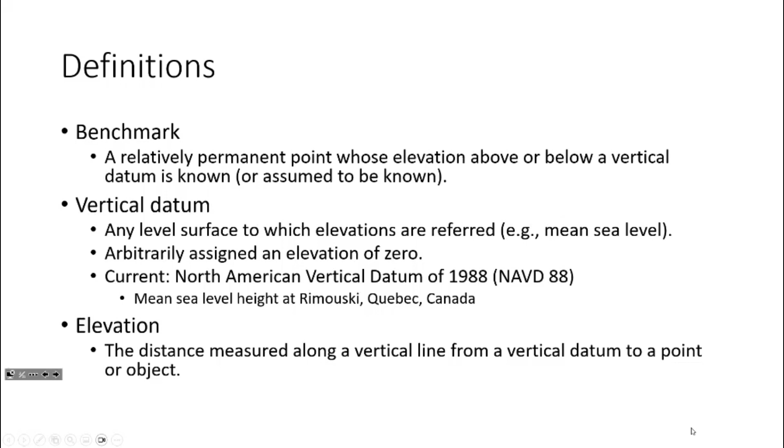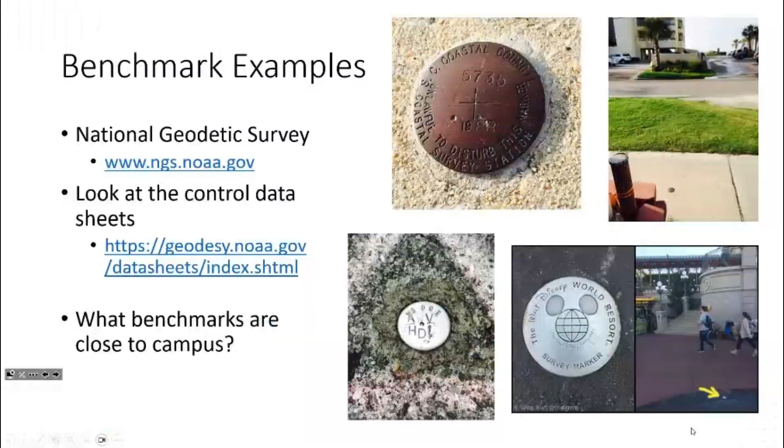You can look up benchmarks pretty easily. I have this website right here, and you can look up the control data sheets. I've got a couple of slides to show you what this looks like. I went to this site and put in Huntington, West Virginia, and you can see all of the benchmarks located. This is pretty much near Marshall's campus.

Different benchmarks are going to be set for different data. Some of them are only going to contain vertical control. Some are going to contain X, Y, and Z. Some might be for GPS and what have you. So let me show you one. If we look right here, this is the Huntington area, and I'm going to show you what one of these data sheets looks like for the benchmark right here. This is the one at Riverfront Park.

When you pull the data sheet, it sort of looks like this computer readout, but there's a couple of lines that are really key. For example, here we have NAD 83, this shows the datum 38, 25, 25.62 north, 82, 26, 34.74 west. What do you think this first row is? It's coordinates, specifically latitude and longitude. So this is the latitude and longitude of this monument, and then NAVD 88, the height in meters and in feet.

We can assume that point has an elevation of 547.76 feet. Some of the data sheets actually contain photographs. This one did as well, and I put those photographs here so you can see where the benchmark is. This is the flood wall at Riverfront Park, and they have the benchmark inset into the wall, so you can go there and see the point in question. Some of them have photographs, some don't, but they're all going to contain lat long and elevation. Does that make sense?

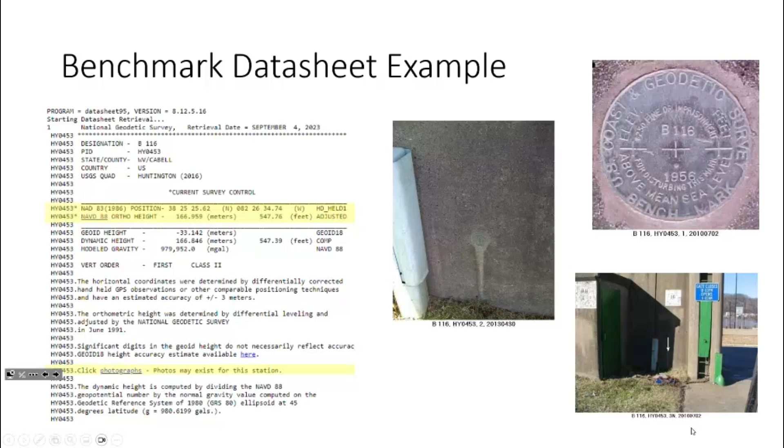The idea is that if you're performing a survey, you can tie into that, reference off of that, and begin your work. I just want to make sure everybody's clear on what a benchmark is. We are going to use a benchmark today. I have a point here in front of Morrow Library. We're going to use that as our reference to determine the unknown elevation of a given point. The lab this week is going to be determining the elevation of the bench on the memorial fountain. That's what we're going to be doing today.

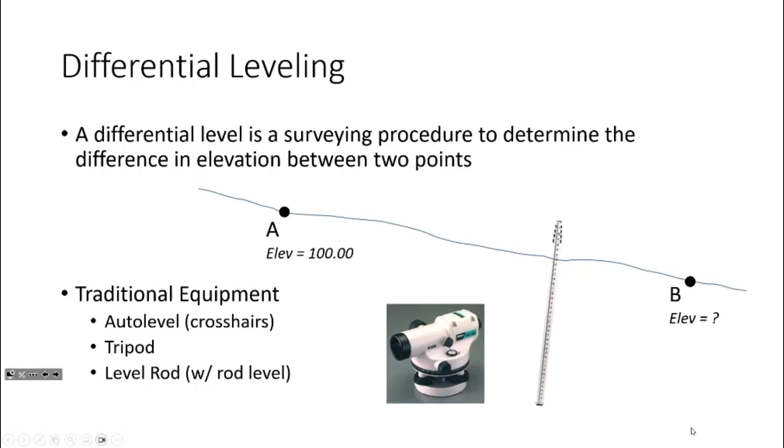Okay, so let's talk about differential leveling. A differential level is a surveying procedure where we take the elevation of a known point and use that as reference to determine the elevation of an unknown point. In order to perform a differential level, you don't need a total station. All you need is an auto level, a tripod, and the level rod with the rod level with it. So the amount of equipment we're going to need today is far less than we needed in our previous lab.

So I've got benchmark A, and let's assume for our discussion purposes that the elevation of benchmark A is known. I'm just going to make up a number, let's say it's 345.60 feet. And let's say the goal of the survey is to determine the elevation of station C, what have you.

Normally what you would try and do is perform as few measurements as possible and measure as directly as possible. But let's say there's a big building in the middle of the way and you can't shoot that. So instead what you have to do is go around, and you're going to see that very viscerally today because that's what we're going to be doing in lab.

We're going to be surveying from the front field of Morrow Library all the way to the memorial fountain. There's going to be stuff in the way, so you'll have to figure that out. So what we'll do is perform a series of intermediate setups. Maybe we'll start off by setting up the instrument right here. So we'll set up our level right here, get it set up and whatnot.

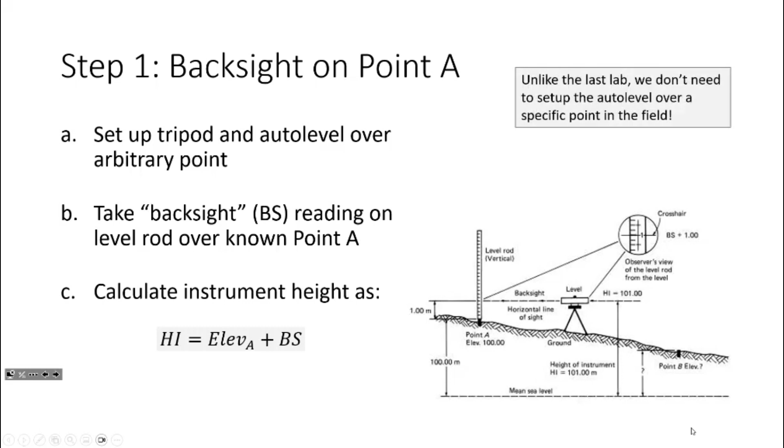So what we'll do is read the rod, and we call that a foresight. So we run the foresight. Now let's say we do this foresight reading, and let's say it's, I don't know, 6.75 feet. What does that tell me? Well, from the first measurement I took the elevation of the benchmark, added the backsight, and that told me the height of the instrument. I can take the height of the instrument, subtract the foresight, and that tells me the elevation of this turning point. Does that make sense?

And so the way a differential level works is like this: you're going to take a backsight, then turn and take a foresight. Then once you've taken the foresight, you take the instrument, move it somewhere, let's say right here, and then take a backsight on the turning point, go back up to the next station, take a foresight - it's sort of this leveling loop. So you start: instrument here, backsight, foresight, instrument here, backsight, foresight, instrument here - you have this chain link that you keep going.

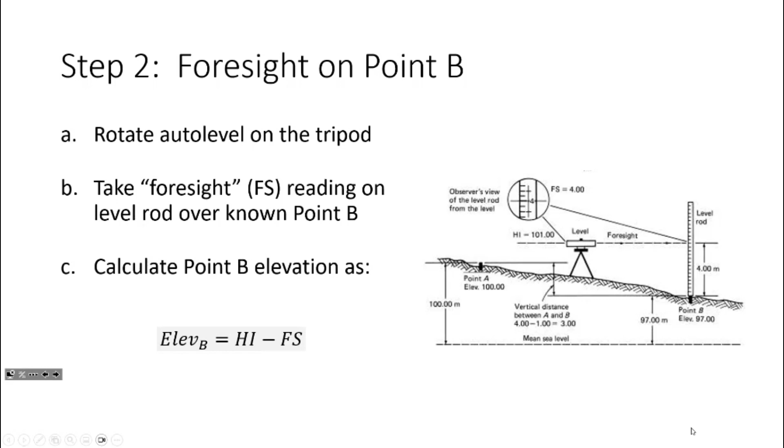Until you get to a point where you have a setup right here, you have your backsight and then your foresight, and you end up back where you started. Does that make sense? So that's kind of the idea of a differential leveling loop, okay? Now, a couple things about differential leveling loops - first off, unlike the last lab, this is going to be kind of weird, but it doesn't really matter where you set up the instrument.

What matters is that the instrument is level, that it's free from obstructions so you can actually see your backsight and foresight, and that your distance between those two points are relatively equal. So we don't need the plumb bob to get the instrument over a specific point. What matters more is that your benchmarks and your turning points are well established.

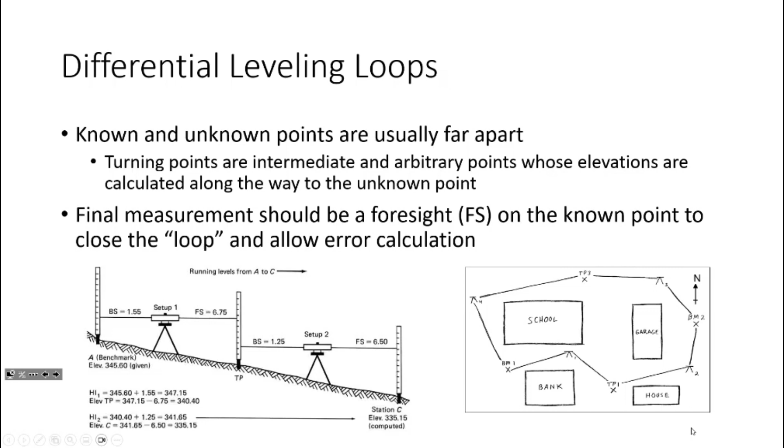Again, like I said, the idea is that you're going to perform this in a loop. Setup, backsight, foresight, setup, backsight, foresight, setup, backsight, foresight. So you have this sort of loop setup. Everybody with me on the idea so far?

Okay, now before we get into the calculations, I want to make sure that we're clear on how the notes are set up, because the notes might be set up in a little bit of an odd fashion the first time that you see it. So I want to make sure that's very clear.

So what should happen first off, your very first row? So what I've got here is my table, and don't worry, your lab handout will have the guide on how to draw your table, but I want to go through this with everybody. Your very first row will be the benchmark that you're using. That's the starting point, the known piece of elevation.

So we're going to start out with our benchmark here, and we know the elevation is 345.60 feet. I'll just leave the feet off because everything's going to be in feet. With me so far? Now, if you recall, the very first thing that we did is we did a backsight

onto point A, we set up our instrument and we did a backsight on point A. So we did backsight, then foresight, backsight, then foresight. So we backsighted this point, the number I used was 1.55 feet. But then the next thing I did is I did a foresight. I didn't do a foresight on this point, I did a foresight on turning point 1. So my foresight doesn't go here, it goes down here. So my foresight of 6.75 goes here.

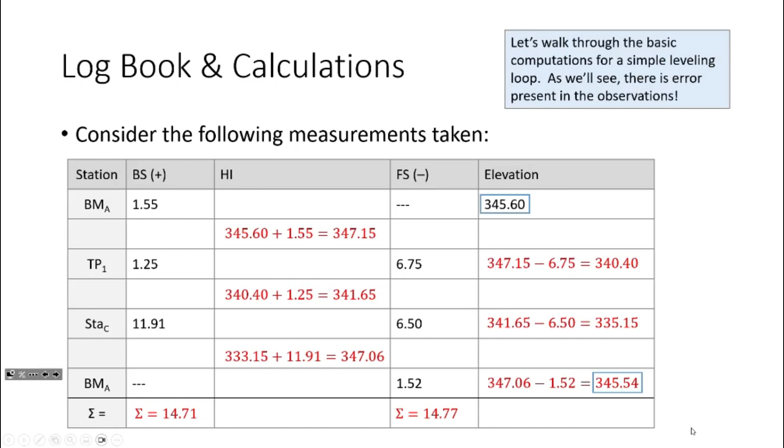0.06. That process is what's called a page check, and it's something that I want everybody to do in lab today, to make sure that when you're performing your calculations, the difference between these two matches the difference between these two. Does that make sense?

Okay, alright. So here's the procedure, right? You locate a point of known elevation, which I'm going to give you. You set up your tripod and your auto level between that and a turning point. Backsight the known elevation, foresight the turning point.

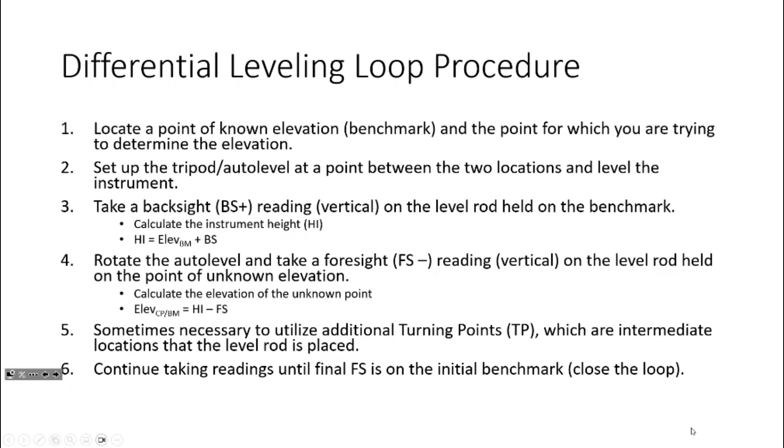Then the rod person stays here. You move the instrument and you keep repeating the process until you get back to the initial benchmark, closing the loop. Does that process make sense?

Okay, now what we were talking about, what you identified is what's called a page check. So the error of closure, and I will probably call that closure or misclosure, it all means the same thing.

The closure can be calculated two different ways. You can take the sum of the backsights minus the sum of the foresights and get negative 0.06, or you can take the final elevation minus the initial elevation and get negative 0.06, okay? If you do that calculation both ways, you should get the same answer.

That's what's called a page check, and I want you to do that today just to make sure that you don't have any math errors when you set everything up, okay? Everybody with me so far? Okay, any questions on the idea?

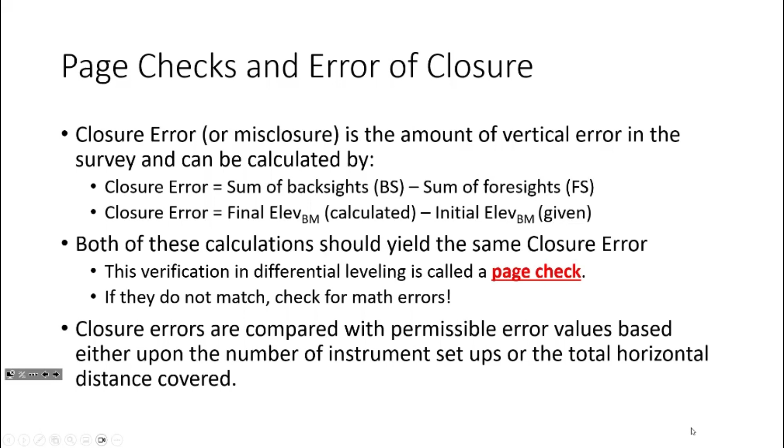Okay, alright. Now, with differential level surveys, with vertical elevation measurements, we have different orders and classes of the survey, okay? We classify a survey based on essentially two quantities: how much misclosure we have and the distance traveled. Now, for this lab today, we're not going to measure the distance traveled.

The reason why is because there are two ways of determining this adjusted elevation. One is using an equal adjustment, one is using a weighted adjustment. The equal adjustment is easier and doesn't require distances. And I want you to get used to doing a differential level, so I'm going to try and make it as easy as possible during the first lab.

But you do need that distance in order to compute the closure, the classification, or the precision of the survey. And don't worry, we'll get to that in lab here in a bit. Okay, now, in order to compute the allowable closure error, we use the following expression.

So we take the closure and compare that to the square root of the distance traveled and this constant, according to this table here. In order to have, let's say, a first order class 2 survey, your M value needs to be 4 or smaller. The big item to keep in mind is that this is in metric, so you've got to do some unit conversions.

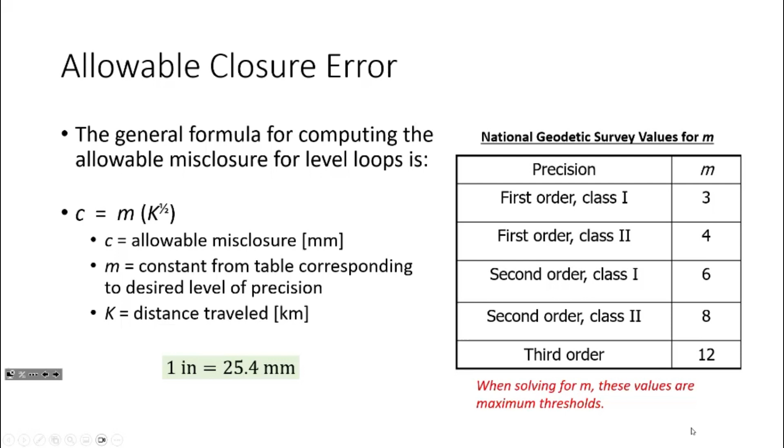All right, let me show you how this works. Let's do a couple of these quick error examples. This isn't incredibly difficult. I think you'll see how it works. I just want to make sure we're all comfortable with this part.

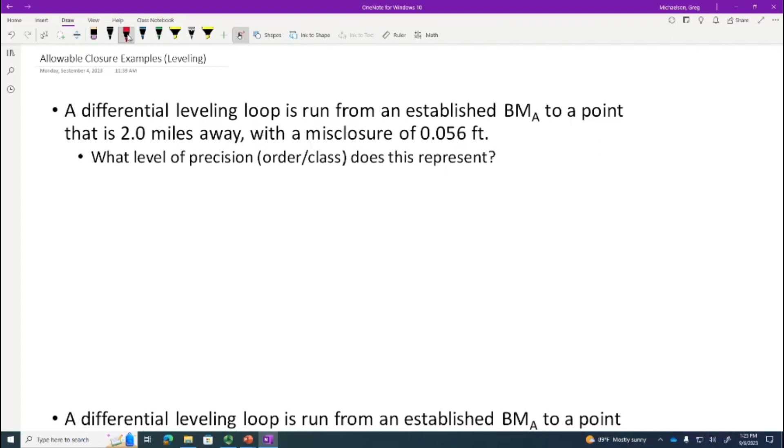Let's start with the first one, which is more in line with what you'd need to do in the real world. Let's say you've run a differential leveling loop from an established benchmark that's 2 miles away. Now the misclosure is 0.056 feet, so let's consider that C is the closure error, which is 0.056 feet.

Now the distance traveled - let's pay attention. If a differential leveling loop is run from this benchmark to a point that's 2 miles away, what's the total distance traveled? Keep in mind, it's a loop. 4 miles, right? We're going 2 miles there and 2 miles back. So we'll assume the distance traveled is 4 miles, because it's there and back.

Now we've got to convert this to metric. For the C quantity, we'll say C is 0.056 feet, and we'll use: there's 12 inches in 1 foot, and 25.4 millimeters in 1 inch.

Anybody got an answer for me on this one? Because everybody brought their Casio FX115 ES Plus or similar scientific calculator to class, right? Of course. That should just roll off the tongue. I mean, come on, what are we talking about here? Everybody brought their calculator to class, right? I'm waking everybody up. We're going to be outside here in a little bit. At least some of you are.

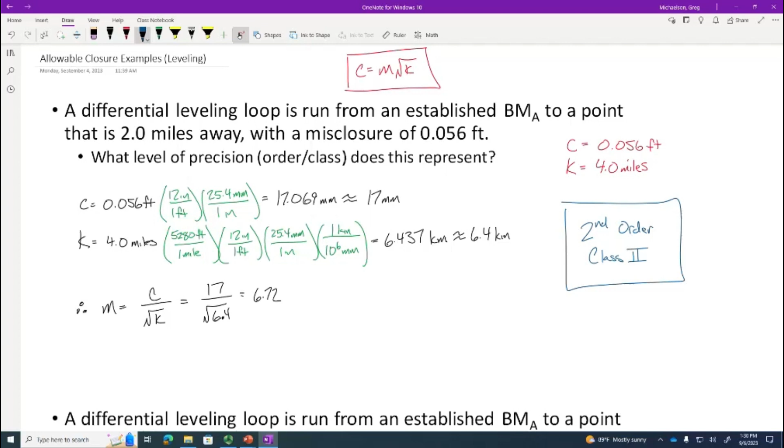So this one's a little backwards. We've got a differential leveling loop that we're running from an established point to a point that's 3.5 miles away. So my loop in this case is 7 miles. And then we'll do the same thing.

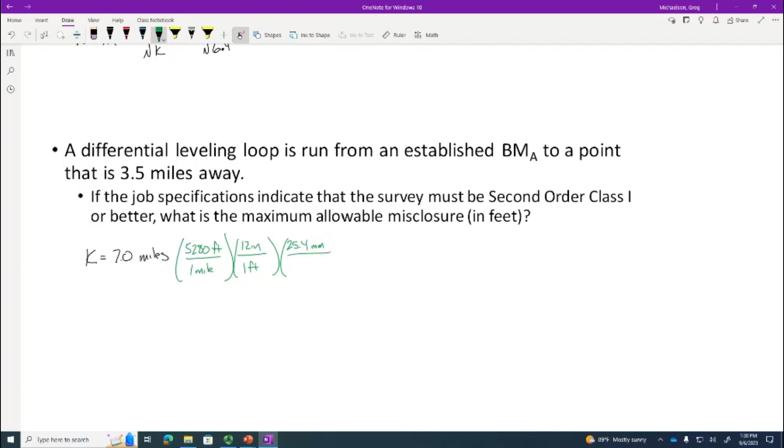And then this is 10 to the 6 millimeters, 1 kilometer. I'm getting 11 something. Anybody else getting that? 11.265. That right? So to 2 significant digits.

So 11 kilometers. This one's asking something a little different. Let's say this is before the job is conducted, and the specifications indicate it's got to be a second order class 1. So second order class 1 is asking what's the allowable misclosure. If we go to our specifications, we find that for second order class 1, we need an M value of 6. So an M value of 6 means that our misclosure is going to be computed as M times the square root of K.

So 6 times the square root of 11. And what is 6 times the square root of 11? It comes out to about 19.8997, something like that. Keep in mind that's in millimeters. So we'll call that, I don't know, 20 millimeters.

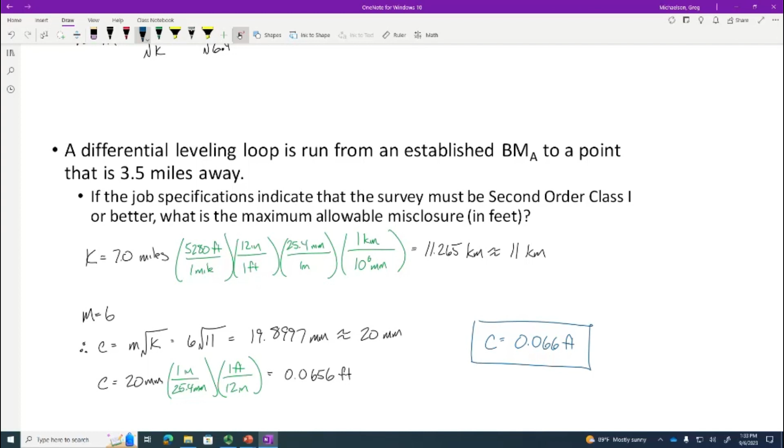Does that make sense? Everybody okay with that? I didn't think these calculations would be terribly difficult. I want to make sure that we're comfortable with the adjustment part, and that's what I want to spend the rest of the lecture discussing, these adjustment mechanisms. But so far so good?

So what we're going to do is we've got to fix this problem. We've got to adjust our elevations such that we close our loop. And there are 2 means of doing that: one is an equal distribution of error, and the other is a weighted distribution of error. We'll talk about weighted distributions on Monday.

Okay, so let's go back to our loop. This is the same loop I have here on the board. And the page check, as I mentioned, so we have our closure, which is the sum of the backsights minus the sum of the foresights. We got negative 0.06. And then we can also check that with the final elevation minus the initial elevation.

That's what we're going to try and adjust. So sometimes students get a little concerned about the signs. With both methods, let's just keep this simple. See how this elevation is lower than this one? So what that means is that all of these intermediate elevations need to be raised a little bit such that this gets to 345.6, because this is our known elevation. This value down here needs to be 345.6.

So what we're going to be doing is raising these elevations a little bit. Now, how much error do we have? We have negative 0.06, right? That's our error. Now, how many instrument setups did we have on this level? 3. So an equal distribution of error would mean we have this error across 3 setups, so we need to do an adjustment of positive 0.02 for every setup. That's an equal adjustment of error. Okay, so that's what an equal distribution means.

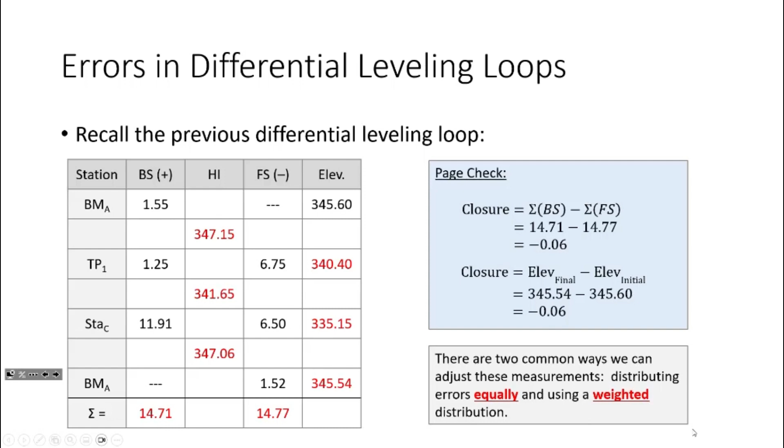I've got some formulas here, but I really think that once you see the pattern, you'll go, oh, okay, the pattern's usually a little easier to follow than the formula. The idea is that we compute an adjustment, which is the misclosure divided by the number of setups. Now I've got a negative in here because I've got to flip the sign. My error is negative 0.06, so my adjustment needs to be positive to bring everything up. So what I will do is I will recompute these elevations.

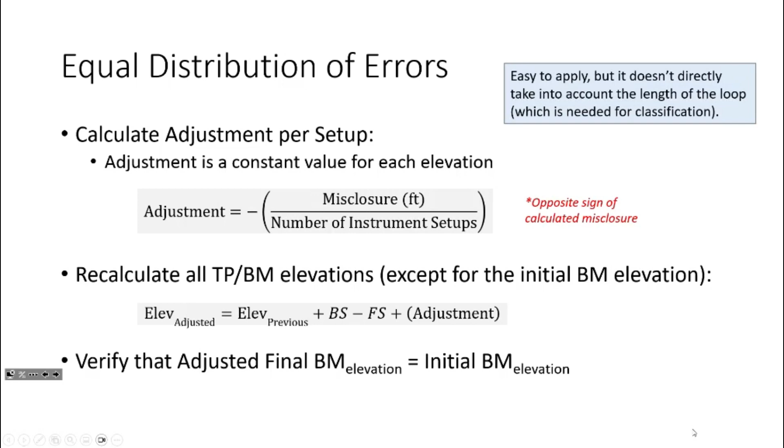And I'll recompute these elevations by adding this adjustment, okay? So let me show you how this works. Here's this table on the screen, I've got it here on the board. Let me grab these markers and let's walk through it.

So I'm starting out, my adjusted elevation needs to be 345.60, because I know that's not going to change. That's my benchmark, that's my known elevation. So how do I compute this elevation right here? How do I do it? Well, I start off with

345.6. What am I going to do? I'm going to add my Backsight, which was 1.55, and subtract my Foresight, which is 6.75. And that's how I got this number.

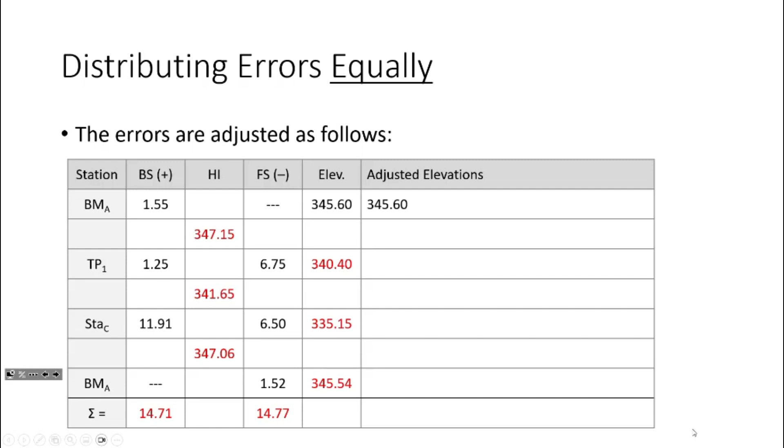But now what I've got to do is add my adjustment. So instead of 340.40, I'm going to get 340.42. Does that make sense? So that's what I'm going to do right here. That's how I get this first one, this value right here.

So how do I compute this one? Well, what I do is I take my adjusted elevation, add the Backsight, subtract the Foresight, and then add another adjustment. So I don't use this number, I use my new one. Take my new elevation, add the Backsight, subtract the Foresight, add the adjustment, and what do I get? I get 335.19.

With me so far? So again, I'm basically doing these adjustments all over again. I'm doing these elevation calculations, but I'm referencing this new column. So what do I do down here?

Take my new elevation, 335.19, add my Backsight, subtract my Foresight, and then add my new adjustment. Somebody calculate that out, tell me what you get. My new elevation, add the Backsight, subtract the Foresight, add my adjustment. What do I get?

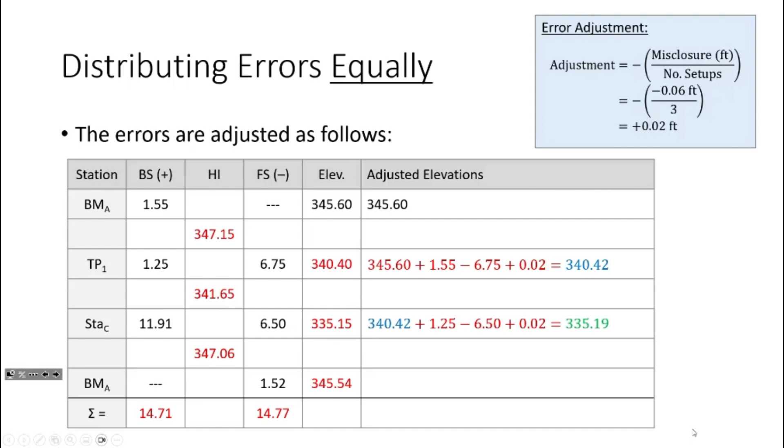345.6. Exactly where I started. Does that make sense? What do you think? Is that complicated? That's basically what we're doing. And to make sure we're all comfortable with this, I've got an example we're going to do here in a second. We're going to do one more, fully, start to finish, together.

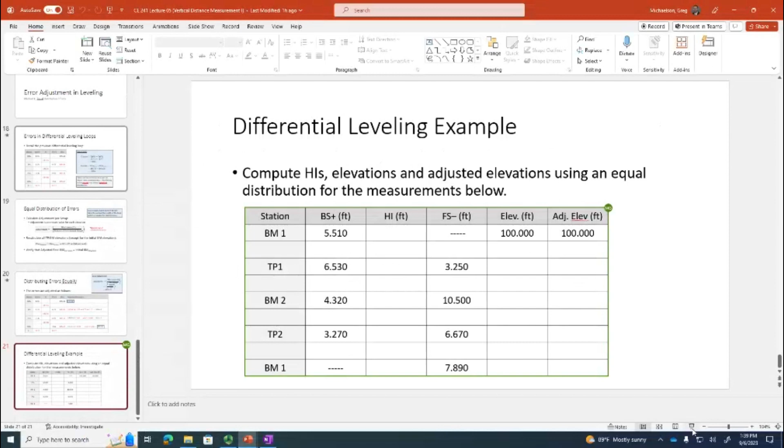All right, I'm going to make this table a little bigger to make sure we're all comfortable with this. So what we're going to do is we've got a leveling loop with a table set up for it, and we're going to perform all of our calculations necessary for heights of instruments, elevations, adjusted elevations. We're going to do this start to finish. Let's see how we're doing.

So we started out with a benchmark of 100 feet. We took a Backsight of 5.51. So what can I do with that? Elevation, Backsight, what can I measure now? I have to look at your elevation, and where does the height of instrument go?

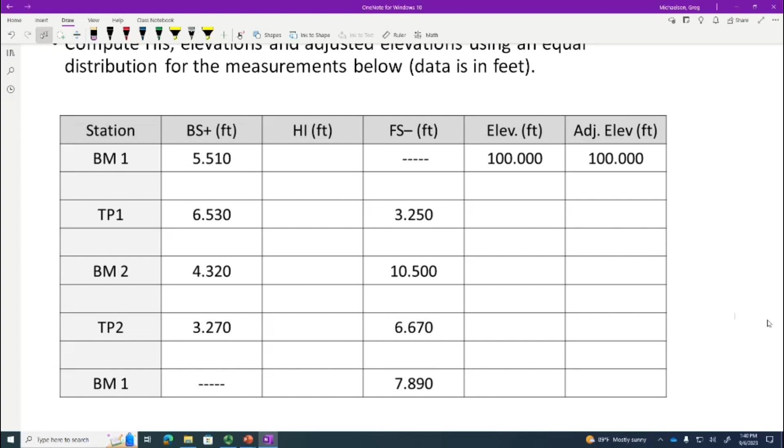In between the rows, right there, doesn't it? So I take my instrument height and put that right here. So if I start at 100 and add 5.51, I'm going to get 105.510 right there. I take my instrument height, subtract my Foresight, and that tells me the height of this turning point, and 105.51 minus that is going to be 102.260. Sound good? And so we continue on with this pattern.

Take that, add the Backsight, and I can put that right there, and I get 108.79. Is everybody following with me on this? So remember, you always have that level split right there. And if you need, you can say okay, this right here is the height of instrument 1, this is the height of instrument 2 - except if you need to do that.

So I take the 108.79, subtract my Foresight, and I get 98.29. Right? Take that, add my Backsight. Now I've got 102.61. You see where I'm coming up with these numbers? So I'm taking my elevation, adding my Backsight to get my instrument height, then taking the instrument height, subtracting the Foresight to get the elevation.

So that's why we write the columns like this: the Backsight has a plus, the Foresight has a minus. That's our way of remembering that. So 102.61 minus 6.67, this is 95.94. Then what do we do? Take that, add the Backsight to get the instrument height.

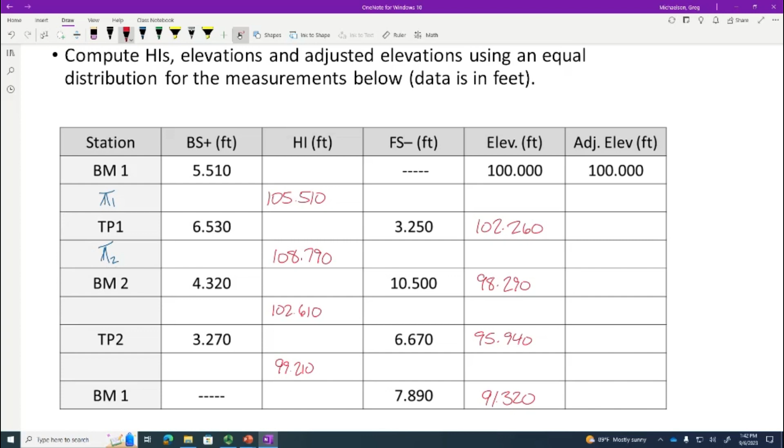Take the instrument height, subtract the Foresight to get that. Make sense? Now this loop is off. This is an off loop, right? We have some big numbers to kind of make sense of this, okay?

So how can we check to make sure that we've done this correctly? Let's sum up our Backsights, let's sum up our Foresights. So I've got these Backsights, take that plus that plus that plus that. I sum that up and I get 19.63. Am I right on that? Yes. Okay, and my Foresights, what do I got for my Foresights?

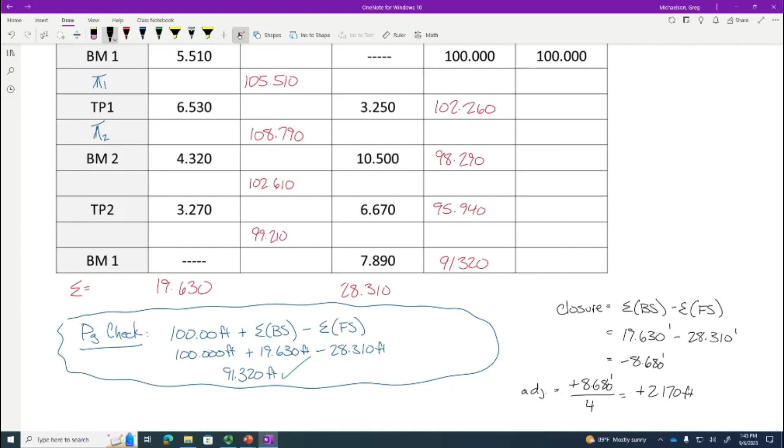It's going to be plus 8.68 feet divided by how much? 4, because there were 4 setups, right? There's 4 setups. So 8.68 over 4, what is that, like 2.17? Yes, 2.17. Let me add my 0 there. Okay, plus 2.170 feet. So far, so good? Okay, so 2.170 feet, let's put that up here on the board. So plus 2.170 feet.

Okay, so how do we go about this? So we've got our elevations. We're going to try and fix this. So how do we compute this cell? So we take our elevation, we add our Backsight, subtract our Foresight, and add that adjustment. When we do that, what do we get right here? I want to make sure we're all on the same page with this.

So again, we're taking our elevation, adding our Backsight, subtracting our Foresight, adding an adjustment. 104.43, 104.430. Do I have a second on that?

Okay, what about our next one? So we take our new elevation, add our Backsight, subtract our Foresight, add an adjustment. What goes here? And don't worry, if we're going fast with this, y'all are going to get practice with this here in a bit. It's much more low pressure. What goes right there?

Again, we take our elevation, add our Backsight, subtract our Foresight, add an adjustment. What was our adjustment? Right here, sorry, I'll put that right here, 2.17. 102.63, 102.63. Do I have a second on that?